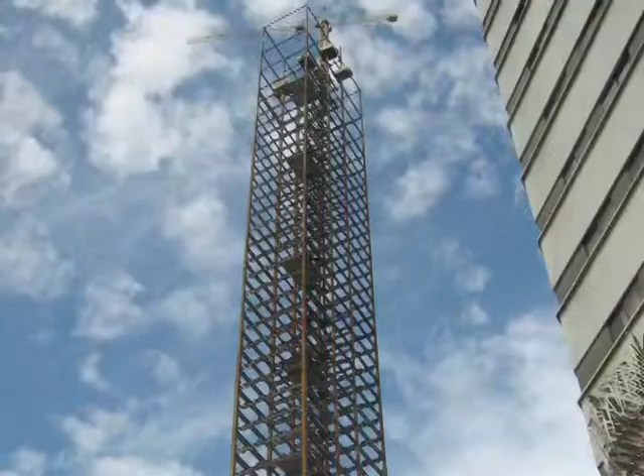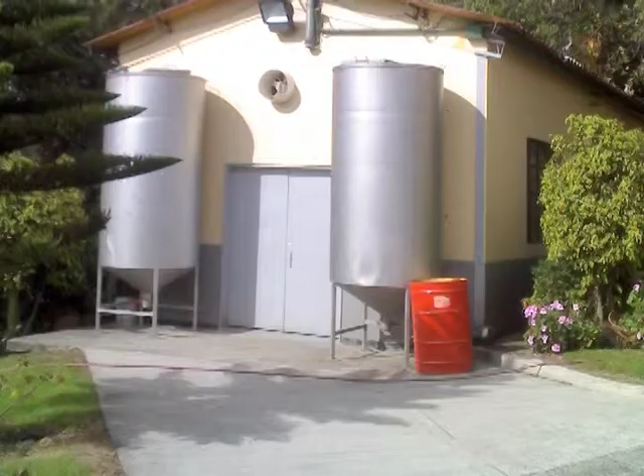The Research Center on Civil Construction Risks, CIROC, of La Salle University was founded in 2002. The main objective of CIROC is to develop the understanding and knowledge of natural phenomena which affect civil construction. Also, its main idea is to create new construction technologies which reduce the risk during the construction phase and during its operational lifetime.

The Geotechnical Models Lab, GeoLab, founded in 2008, is an area of physical and numerical modeling to research soil structure interactions and the monitoring of studies of processes and structures at full scale. An example of the research conducted by CIROC in the GeoLab was the study of settlements induced by TBM in soft grounds in Bogota, Colombia, presented at the World Tunnel Congress in Budapest in 2009.

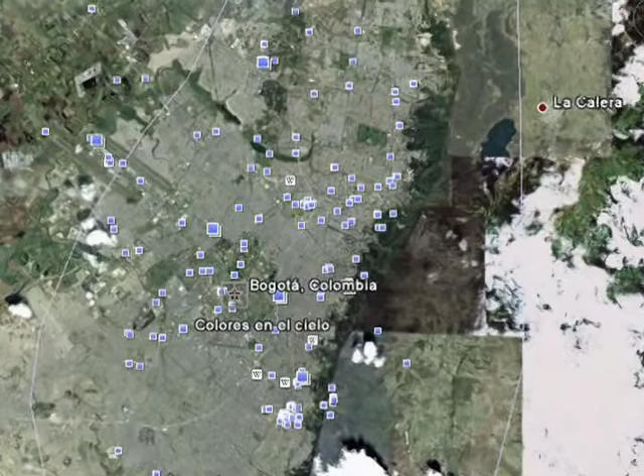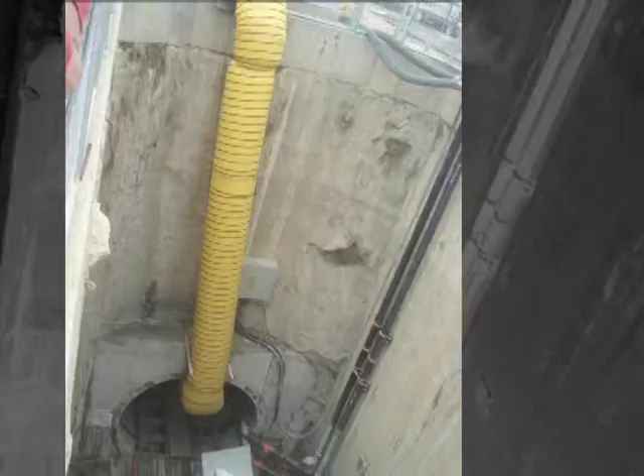The settlement studies were conducted using three research methods: strict monitoring of ground surface movements in an observation area of 40.5 meters by 16 meters over the sewer system tunnel named Fucha-Tunjuelo in Bogota, Colombia.

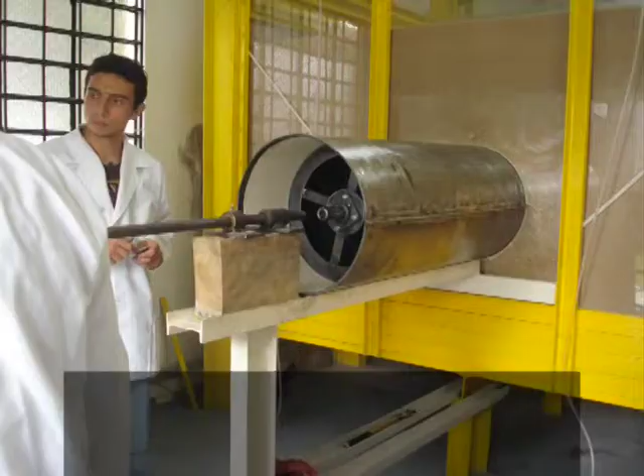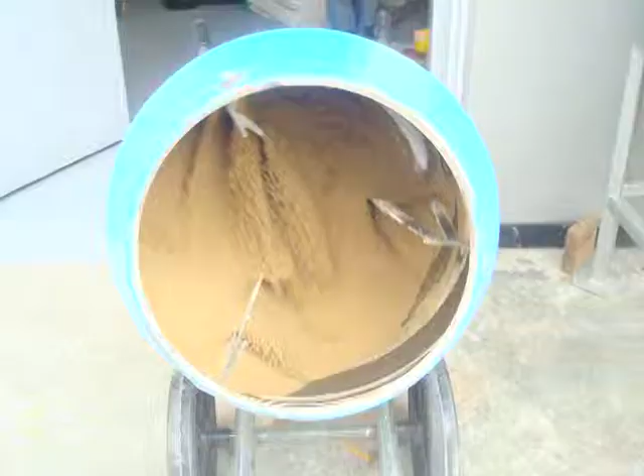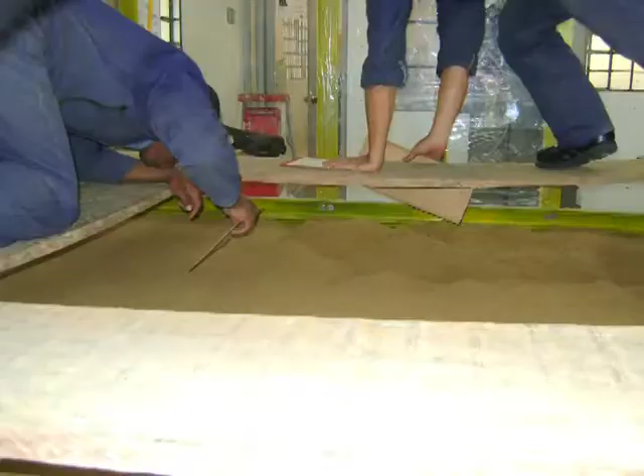The large-scale model was constructed 2.4 meters by 2.5 meters in plan and 1.6 meters deep, being at the GeoLab of the La Salle University in Bogota. A mixture of sand, oil, and bentonite was used to simulate natural soil. This mixture was precisely calculated applying the laws of scales.

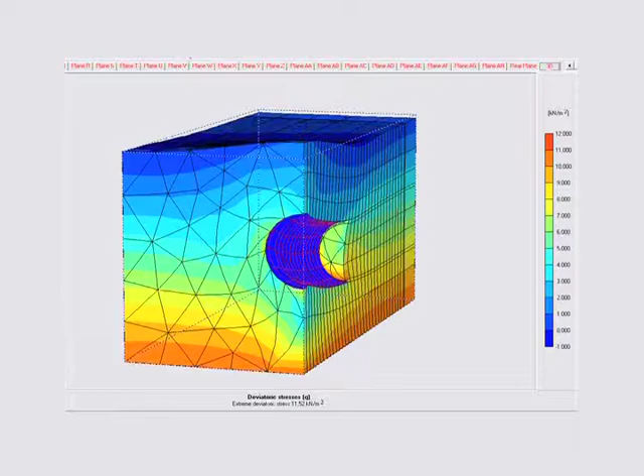The simulation of the tunneling process was conducted with a simple model of TBM prototype and control of pressure in the cut head. Also, a series of numerical models in 3 dimensions using FEM were made. Finally, this research presents the comparison of all results obtained using the 3 research methods, and a particular behavior of the analyzed soil during the excavation is also defined.

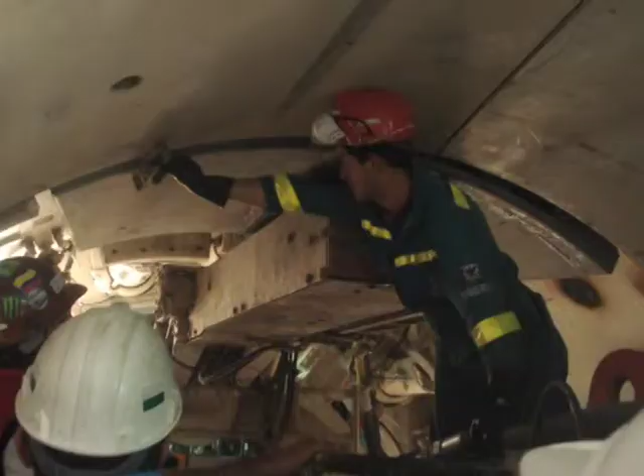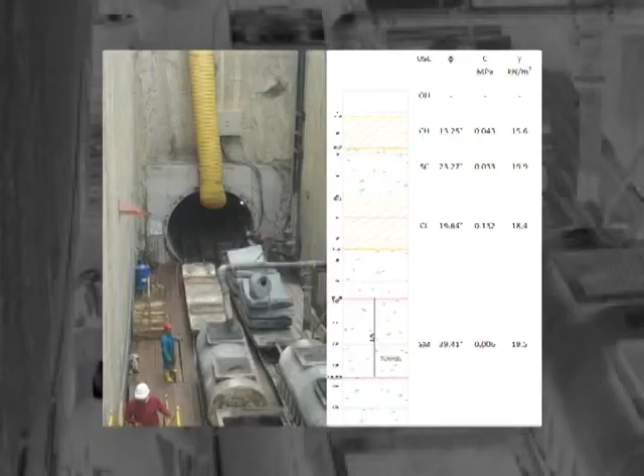The study of settlements induced by tunneling where new technologies are used is important to foment in a safe way the modernization of primary service tunnel systems in Bogota. The monitoring of ground surface movement induced by TBM tunnel construction was performed in an observation area of the sewer system Fucha-Tunjuelo project in Bogota, Colombia. The area was selected from the geotechnical model of the project, looking for a homogeneous zone of typical soils of Bogota.

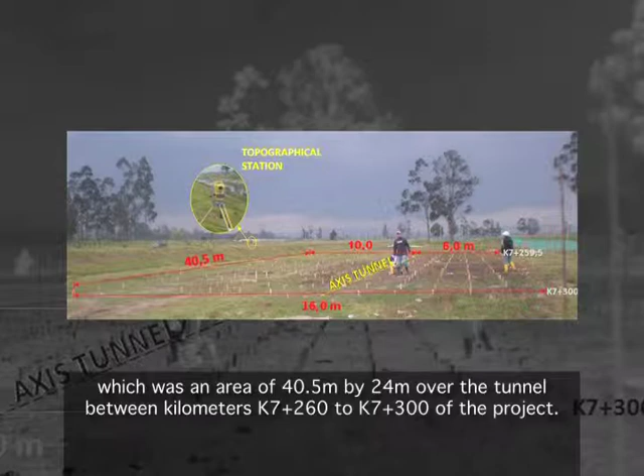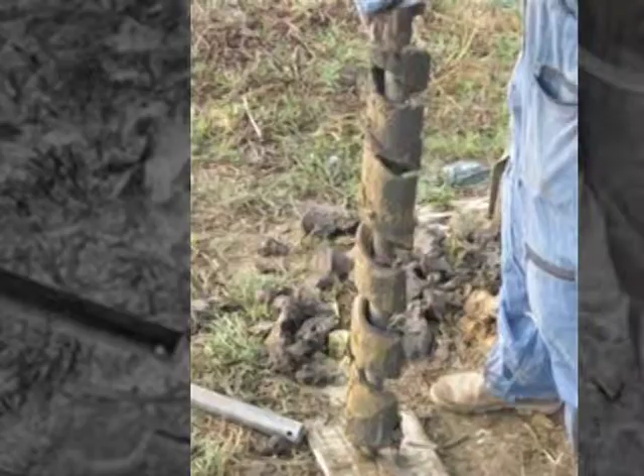The dimensions of the observation area were 40.5 meters by 16 meters. Before taking topographical data, 3 exploratory borings were realized up to half diameter of depth under the lowest part of the tunnel, 2 over the axis and another one 3 meters away from the tunnel axis. Classification and geomechanical soil tests were performed for all the samples. The geotechnical model of the observation area is shown in Figure 1.

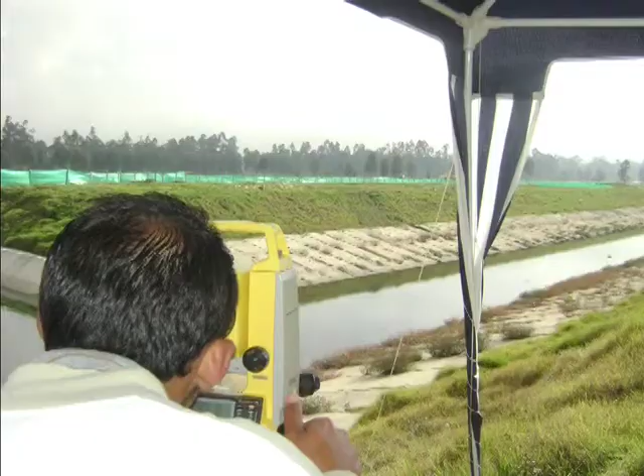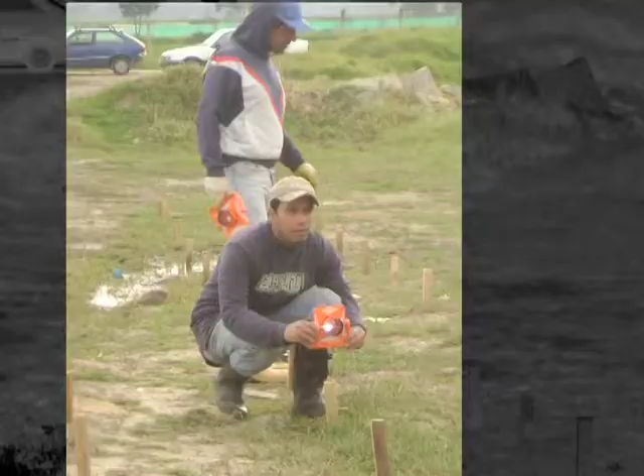A net was built over the trial area with a total of 28 sections of control, each section with 15 control points, a total of 420 control points in the settlement control zone. The control points of the net were measured topographically on Saturday, 28th of February 2009, when the tunnel head was delayed at kilometer K7+252.25, that is 7.75 meters away from the first transversal section of the observation area, obtaining the initial coordinates of all control points.

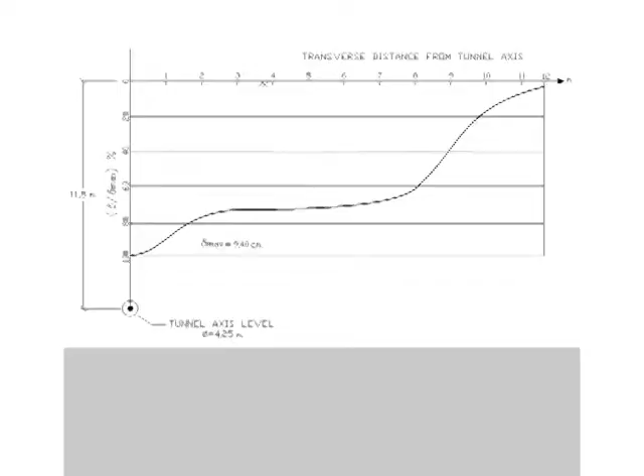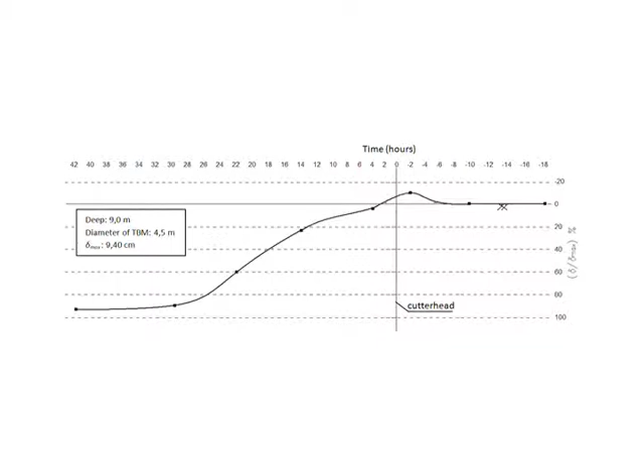This figure shows a curve of relative movements along the tunnel axis vs time in hours from the cutter head of the TBM to the section of control.

At the GeoLab, a physical model of the studied phenomenon was constructed based on equivalent materials technique and applying the laws of similarity for geotechnical studies. The model is under a gravitational field equal to 1g. The similarity between the prototype and the model is simple type. The fundamental scale factors are geometric scale, temporary scale, and mass scale.

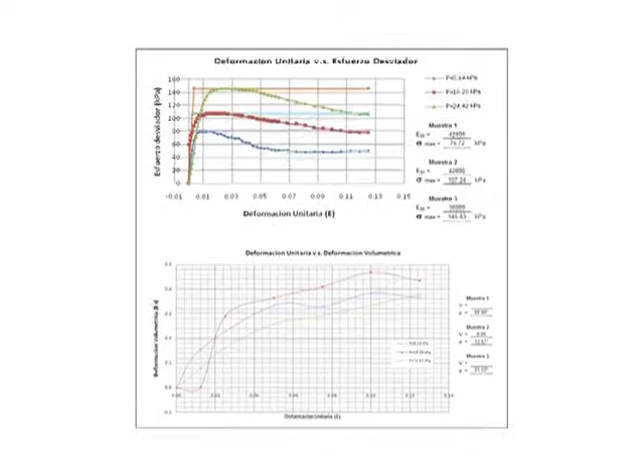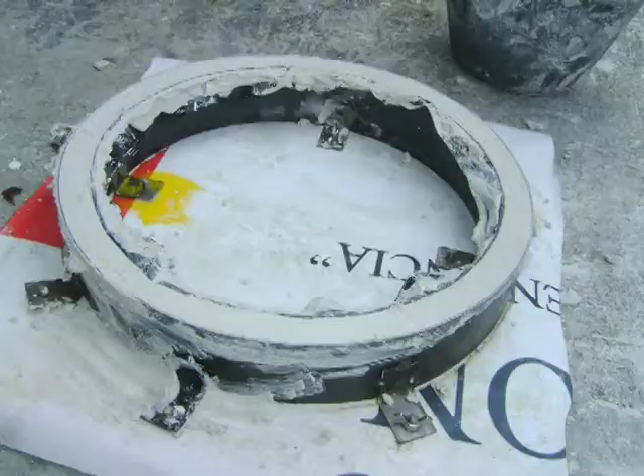In order to determine in the model the equivalent material to natural soil, the GeoLab mixing charts were applied, seeking the perfect mix, which would correspond to all data calculated by the laws of similarity. Finally, a mixture was made of standard sand, bentonite, and industrial oil. To model the concrete rings, a prefabricated mixture of sand, plaster, and water was also composed.

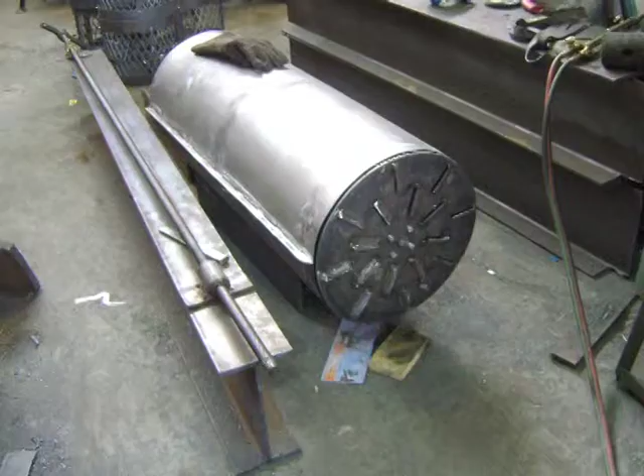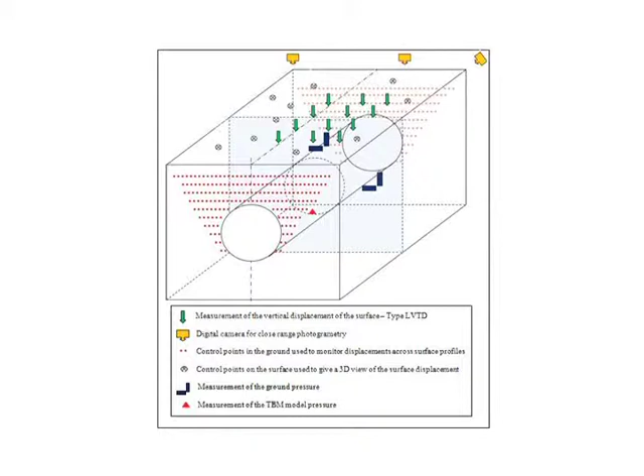The model of TBM was constructed using steel with a rotating cutting head with all dimensions according to the geometrical scale. In the next figure, we can observe the instrumentation installed inside the model. The surface movements were registered by LVDT.

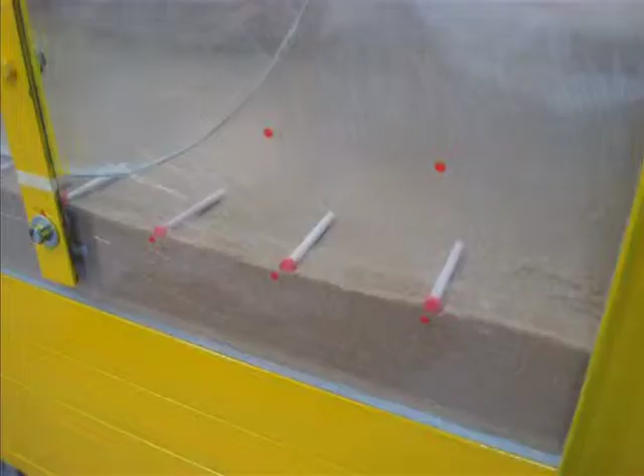Internal pressures of soil were measured by load cells, and vectors of movement were registered using close-range photogrammetry at the surface and in the cross-sections, the visible sides, of the model. The trial test took 12 hours on the 14th of March 2009.

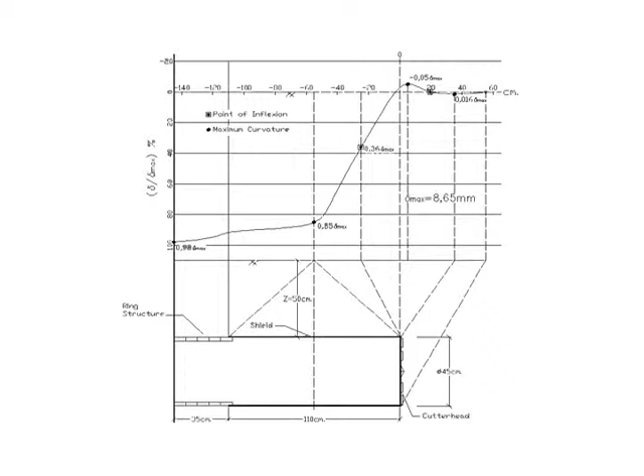In the next figure, we can observe the registered displacements on the surface which are related to the progress of the TBM cutting head, and the register of displacement observed in the control section.

In the investigation stage, three-dimensional models were constructed by the finite element method FEM in the Plaxis 3D Tunnel platform. The results were compared to the field data, and the improvement was 4% in the maximum settlement, 15% in the width of the settlement section, which gives a total variation of minus 18% of volume loss.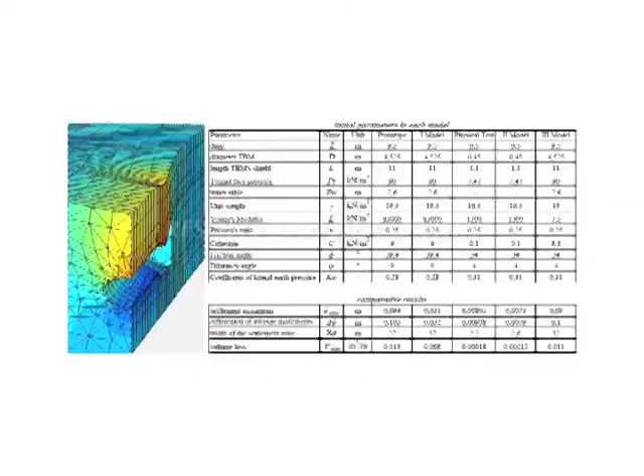Finally, all the data of all three stages of research were compared: the transversal section of settlements measured in field, calculated from the physical model applying the laws of similarity, with the adjusted FEM model and FEM model without adjustments. The graphic shows similarity between the curves of the transversal section of settlements measured in field and the adjusted FEM model, with an average error of 7%.

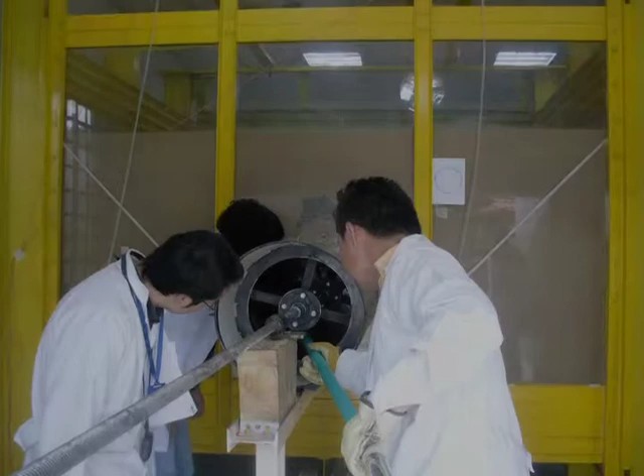The main conclusions of the present investigation are: first, the combination of experimental stages by means of physical models with numerical models by means of FEM allows models to reach such adjustments where particular cases can be studied. In the evaluation of settlements originated by TBM construction, an adjustment of 4% in the maximum settlement was allowed, 15% for the width of settlement zone, and 18% in the data of loss of ground.

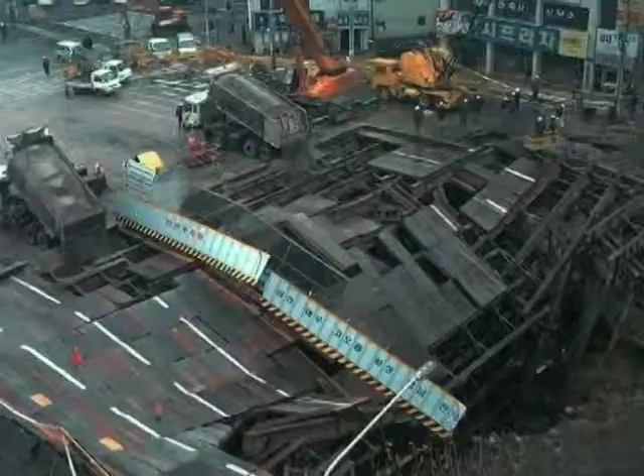Second, for future research where the case of heterogeneous layers in grounds is studied, physical modeling is promising in research on the interaction of different layers and its impact on the settlements phenomenon in tunnels.

The research of settlements induced by tunnel boring machines in soft ground was very important for the research group of civil construction risk, because in first place, the research was presented at the World Tunnel Congress in Hungary, and in second place, the results of the research will influence the development of Bogotá, especially to reduce the risk in future tunnel construction projects like the metro and the transportation tunnel.